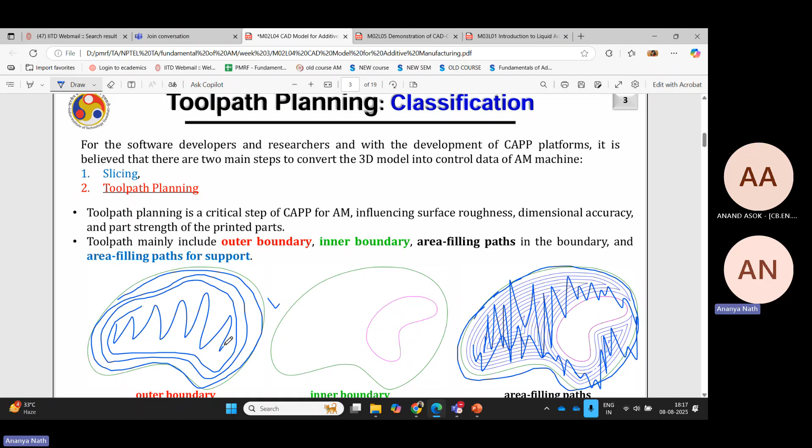So area filling methods can be 2D surface or 3D surface. In 3D surface, it can be grid cutting, pixel, mask, and path, or in 2D surface also. If we are talking about a layer, it's 2D geometry, but obviously the layer is 3D because it has some thickness. So the requirements of area filling methods: quick heat dissipation, minimum number of lifts, constant machine feed rate, constant step over.

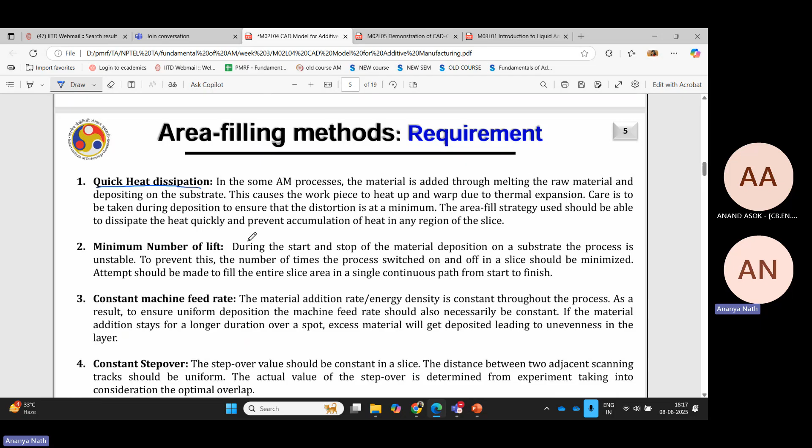Basically, when you are choosing an additive manufacturing process, you have to be sure about how the tool path needs to be planned. The tool path planning will not be the same for each process. It depends on the thermal gradient and the thermal history of the process. Depending on that, you have to define the area filling or tool path planning, as I described for LPBF and FDM.

Grid cutting is used in LOM, laminated object manufacturing, or sheet lamination. The paper sheet will come, and if this is your geometry to be built, a knife will cut this geometry out of the paper, and the portion that is not part will be cut as well. But if the knife moves like this and cuts, there can be some problem. So instead, it cuts the excess portion of the paper grid by grid.

So that it will be more defined, a more controlled process, and like that you can get the geometry. And when the next sheet comes over it, it will again cut the unused portion, and a roller will move from this side to this side onto it, so that the heat and the pressing of the roller can join these two sheets, and this process will repeat itself to get the final geometry. So this is one example of grid cutting.

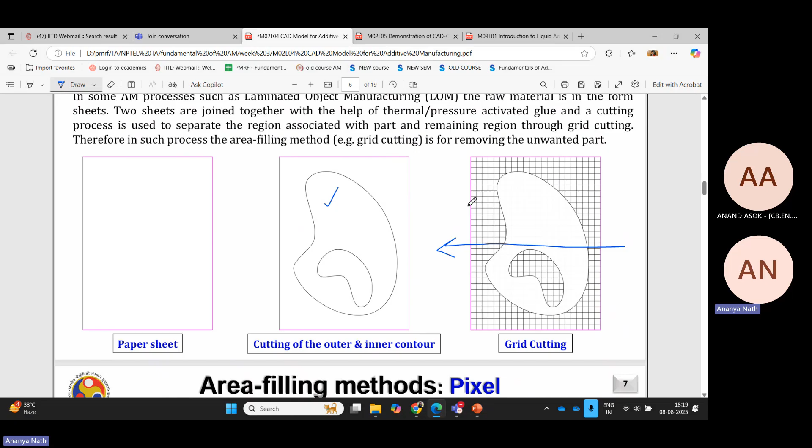Ma'am, can you explain once more? Didn't get it. Yes, yes. So in sheet lamination process, there will be a sheet of paper which will come onto the build plate. If this is the geometry that needs to be printed over it, there will be a knife which will cut the paper like this. So my mouse pointer right now is a knife. It will cut the sheet like this.

Okay. It will be systematic. Then in y direction also it will cut till end. I'm not going till end, but it will cut till end. So the unused portion, which is not necessary for my printing, this portion of the paper I don't need because this is the geometry. So it will cut the paper in this portion so that this geometry will be intact. And this is my first layer.

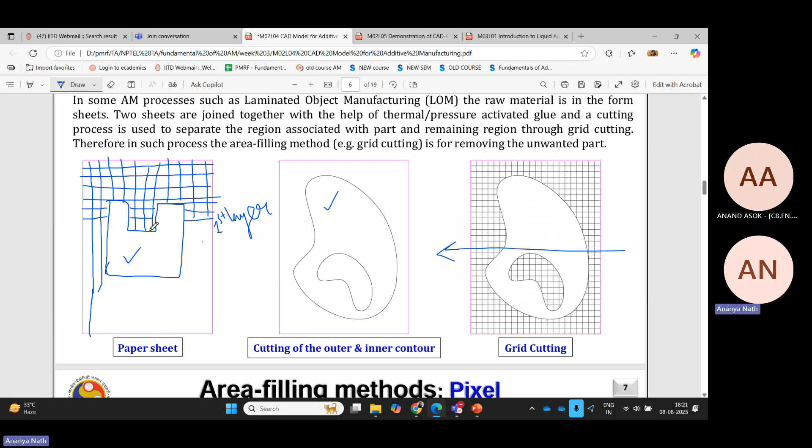When it is cut, another paper will come onto it, another full paper. Again, the knife will try to cut this grid so that this portion will be intact. Now imagine I have two papers in which this geometry is intact in both the papers. Now there will be a roller. This roller will roll over this surface.

So the roller, when it's rolling over the surface, there will be the pressing of the roller, and due to the rolling, there will be some heat also. The roller is a heated roller. So because of the heat and the pressing, these two papers will be fused together. This portion will be intact. Other portion will also be fused as well. But other portion has these cuts as well.

So after 500 layers, for example, this process is repeating. You will have a box like this, which is fully made of paper, right? But from the box, this portion is intact because this is my geometry, and all other portions have this grid cutting. So if now you take a knife and manually start separating this grid cut portion, you will get the intact geometry, and few cubes of paper will come out of it.

Do you understand now? Yeah, the intact portion will come out separately, isn't it, ma'am? Yeah. It will be a little bit fused with this grid cut portion as well. But if you start separating it manually with a knife, it will come out. So that is also a process by which you post process the final geometry produced by laminated object manufacturing.

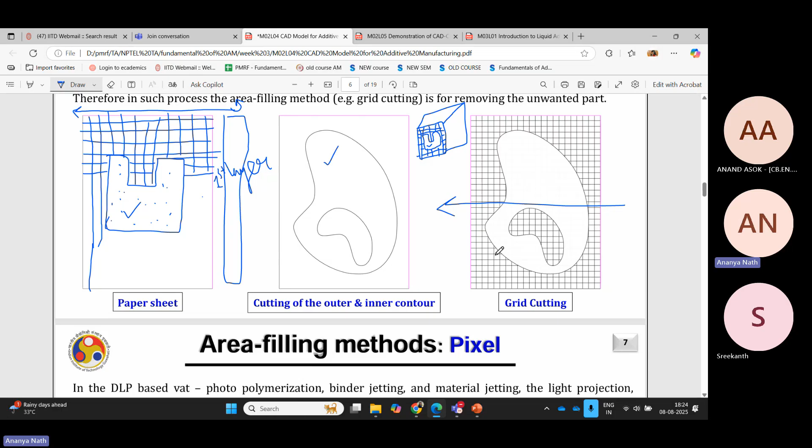So in this process, the tool path planning is basically this grid cutting. The tool is cutting the paper into small grids. So this is the method of grid cutting in laminated object manufacturing, which you cannot find in any other processes. So that's why tool path planning is very separate from process to process. Then come pixels. So pixel is another method of area filling.

So what will happen? In DLP based process, which is a vat photopolymerization technique, I did have a slide last class, if you remember, that there will be a vat of resin. Vat means a container, nothing else. There will be a vat of resin, a container full of resin, and there will be a build plate, which is mounted on a lead screw. This is the lead screw, and this is the build plate.

So, this build plate, and there is a screen from which the UV light is coming. So, this screen is actually placed here, just below the vat. So, now the UV light is coming. So, the screen is looking like this. This is the front view of the machine. This is UV light.

And this is the top view of the machine. From top, you are seeing the screen. Onto the screen, there is this vat full of liquid. And over the vat full of liquid, you have placed your build plate. So your build plate is basically now, if I zoom the view, then it's something like this is my build plate.

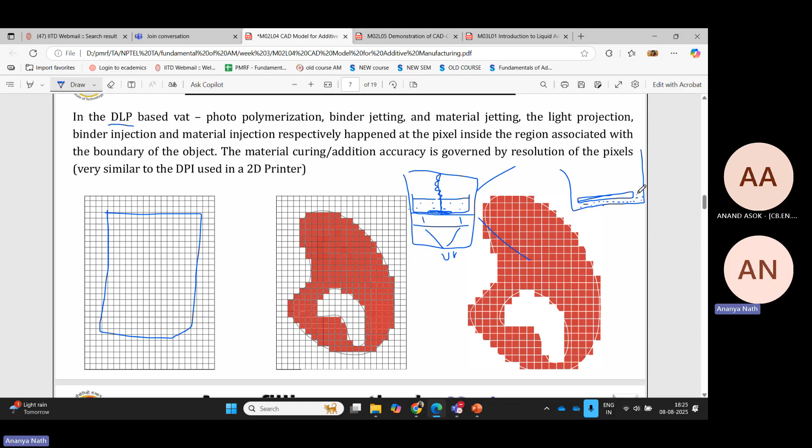This is my vat full of resin. And there is one layer thickness resin present below the build plate. And all other portion is also covered by the resin. I think this point is clear. This build plate is attached here. So this build plate can move up and down.

Now the build plate position is in such a way that the build plate and the screen, this is the screen, so this screen and the build plate are having one layer thickness gap in between. So now my build plate has one layer thickness resin. Now, if my geometry is looking like this and the screen is having this many pixels, so these small squares are called pixels. So in our mobile phone, when we take the photo, it is saved in pixel format.

So in some of the phones where the camera quality is not good, if you zoom the picture a lot, you will see the picture will be segregated into pixels. The picture quality is degraded, we say. So basically, the pixels are not very small, because of which when we are zooming, the picture is giving us that pixel by pixel view. That's why we are saying the quality is not good. So now this screen is also having some pixels. This is an LED screen or LCD screen, the same screen that we have in our mobile phone.

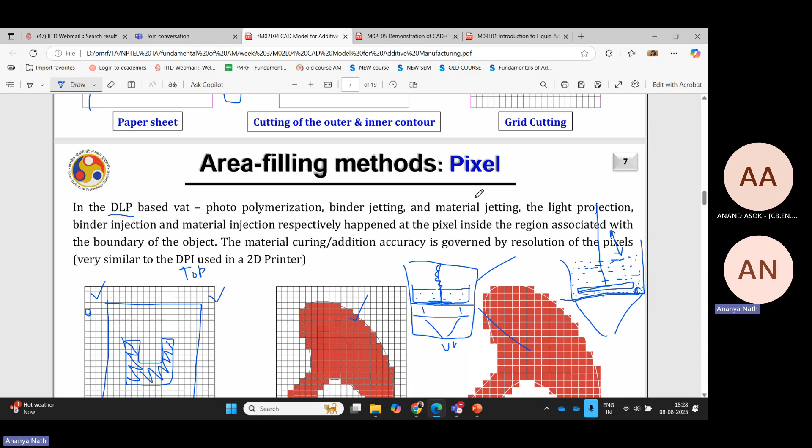Is it build plate or bill plate? Build plate. Yes, build plate. Okay, so only a portion of the build plate needs to be activated, right, ma'am? So there are two things. There is a screen. This is the screen. On top of the screen, there is a vat. Vat means a container. Now the bottom surface of the container is transparent to UV light.

And inside the container, the build plate is there. So if now you give the UV light, the UV light should reach the whole build plate, the whole resin. But now you have placed a screen in between, and in the screen, the pixels are activated in this portion. So only in this portion, the UV light is reaching the build plate. Is it clear? Okay. So the red color that you have shown is the area in the screen? Yes. This is the area in the screen that is activated, ultimately, by UV light.

Yes. So basically, the screen is having the pixels and it has some electrical connections. So when we feed the geometry in the machine, the screen knows in which layer how many pixels need to be activated. And activated means through that pixel, the UV light is coming to the build plate. The UV light is there. This is the UV light. It's reaching the whole screen, but the screen is not allowing the UV light to come and reach the build plate.

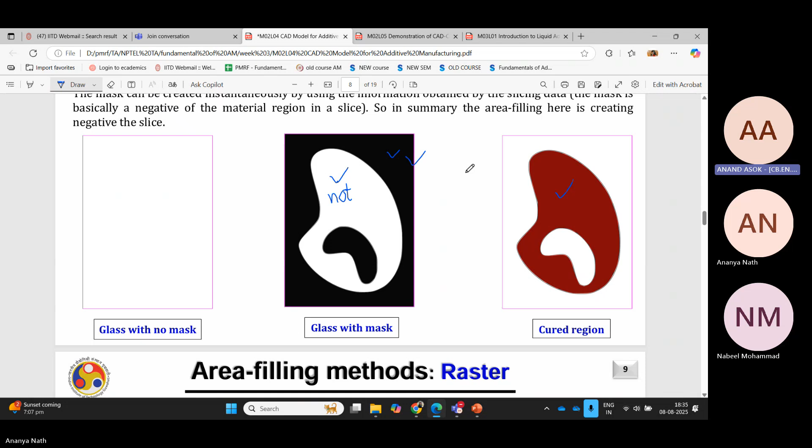So now comes the raster. Raster is a thing that you need to learn, because raster is a pattern that is used in all advanced additive manufacturing techniques. Raster means a path that the tool is moving.

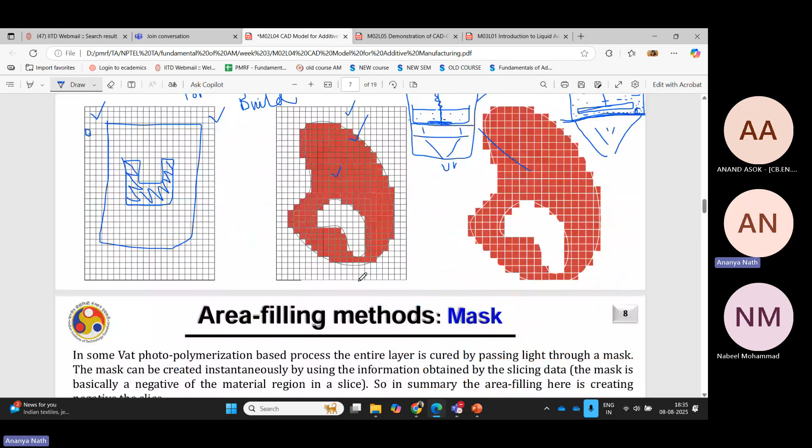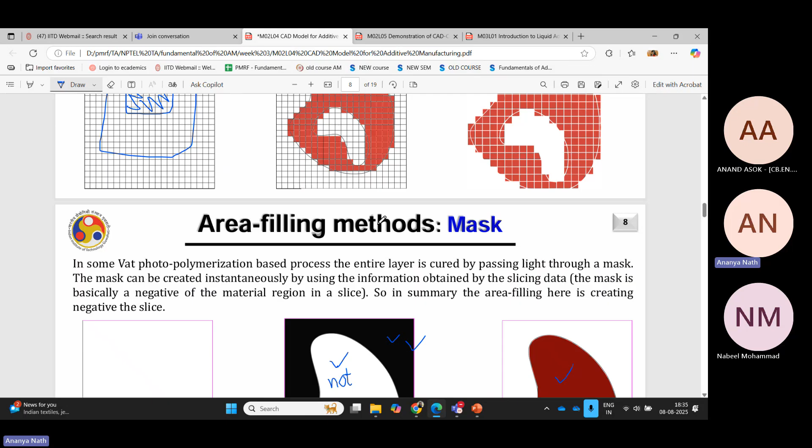In all the cases, we were using a third party. In grid cutting, the tool was moving to cut the grids - the tool itself was moving. But here there is a third element which is working. In DLP, this screen is the third element, which has the pixel activation. Here, the mask is the third element that you're putting onto it so that the UV light can come and cure - the UV light is actually the energy source. Here, the heated roller is the energy source.

But in some additive manufacturing processes like DED and LPBF, you cannot use a mask or a pixel. You have to move the tool itself, just like what was happening in laminated object manufacturing, where the tool itself was moving like this to cut the grids.

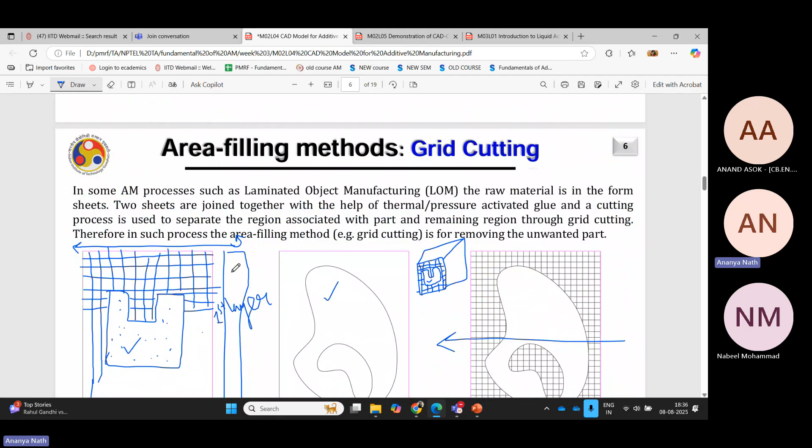Similarly, raster works like that. In case of raster, the tool moves in defined paths to deposit the material. For example, if this is the nozzle, through the nozzle the semi-melted wire is coming. If the wire is coming from here and the tool is moving in this manner, this dotted line is where the tool is moving to its next position, but it's off. The wire is not deposited in this red. These black lines are the deposited lines, these red dotted lines are not deposited, it's just how the tool is coming back to its next position.

So the head will deposit the wire, then it will come back, then again it will deposit, then again it will come back and deposit. This is how it works. So raster path pattern is simple, efficient, and robust to cope with boundaries.

However, the build accuracy is poor in the layer. For example, in FDM, each layer will have these raster patterns which are visible even after printing, because of which the layer roughness is not good. The part is rough, it has surface roughness, it will have some porosity, the geometry is not that well defined, the surface is not that smooth.

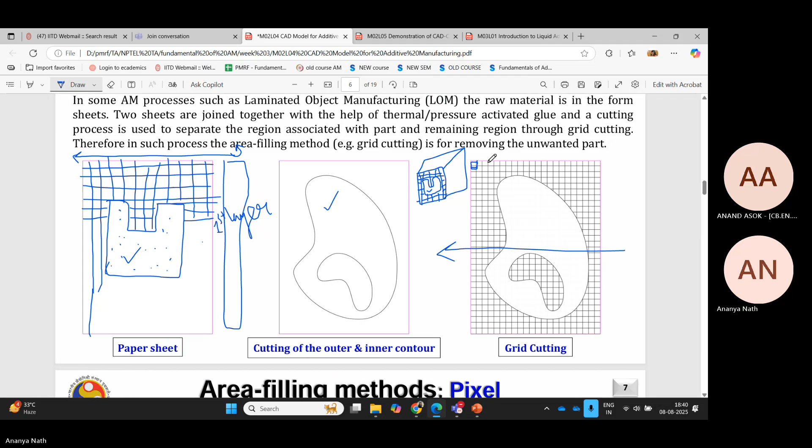Because in pixel, there was only one option - the pixels will be activated and cured. In mask, you just cut the mask in this shape, put it, and it's done. In case of grid cutting, the tool will move and cut the grids - the pixels of the grid, these small squares, are same in length and width. So it's simple.

But here we have shown three different patterns. Why is it so? Just imagine when the whole part is printed like this, and after that you do some mechanical testing, for example tensile testing. If you tensile test this part in this direction, meaning you pull it in this direction, versus pulling it in this other direction, the result will be different because the property in X direction and Y direction of this part will be different. The strength of the part in X and Y will be different because it's very directional deposition - you are just depositing it in one direction.

The porosity in the gaps, like in between two lines, will be very high. If you do rastering in just one direction, it's the same issue. But if you do the third one, you are alternating it, so ultimately when you do the tensile testing of this part in this direction or that direction, the property will be to some extent the same. So we are achieving isotropy in the part.

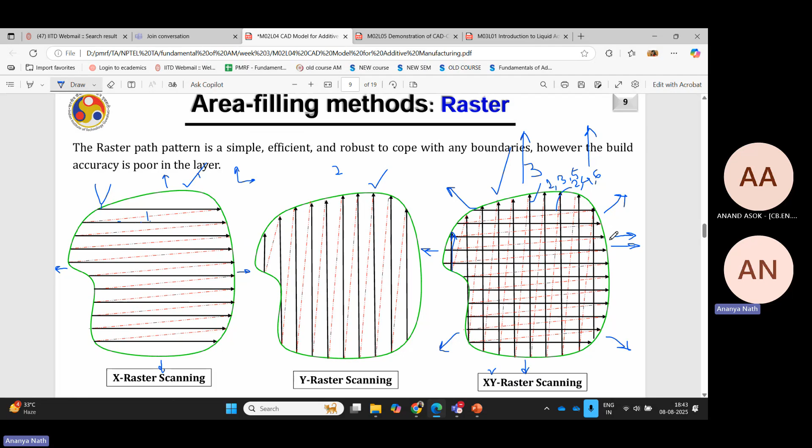When your layer is going only in this direction, this strength will be different than X and Y, and this diagonal strength will also be different, because all your layers are going towards X plus and Y plus. There is no layer going in X minus and Y minus. That's why you get the zigzag pattern.

Zigzag pattern means it's like a rastering pattern. This is my X rastering, and in the next layer it will be my Y rastering. This is called XY rastering with zigzag pattern.

If I talk about this first layer, it itself has isotropic property because all the deposition is not towards one direction, it's in opposite, alternative directions. And if I talk about the second layer...

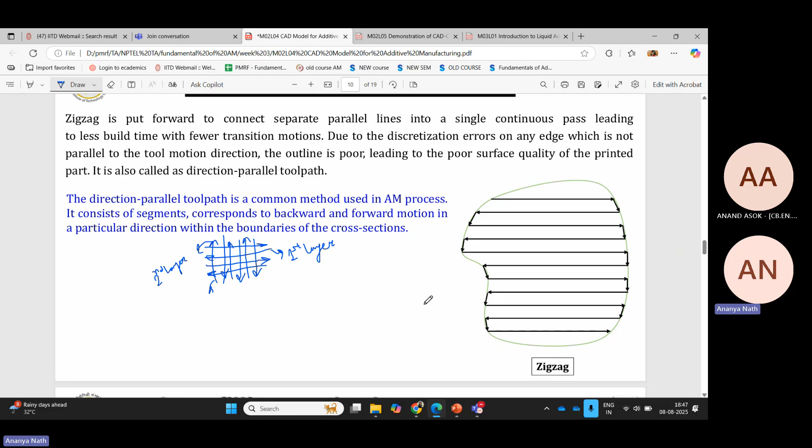Yes ma'am. So if this is my first layer and this is my second layer, in each layer now I have alternative directional layer track deposition. This one line is called a track, and this whole thing is called a layer. Layer by layer we are depositing the product. So now, as I have alternative track deposition, my mechanical properties will be even better, more isotropic, which is required. That's why in rastering, XY rastering is better, and then comes the zigzag pattern, which is again better.

Ma'am, does this contour mean boundary? Or boundary, so...

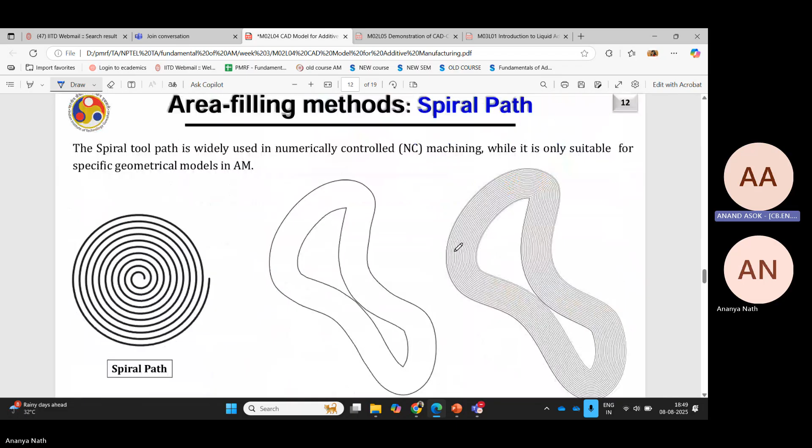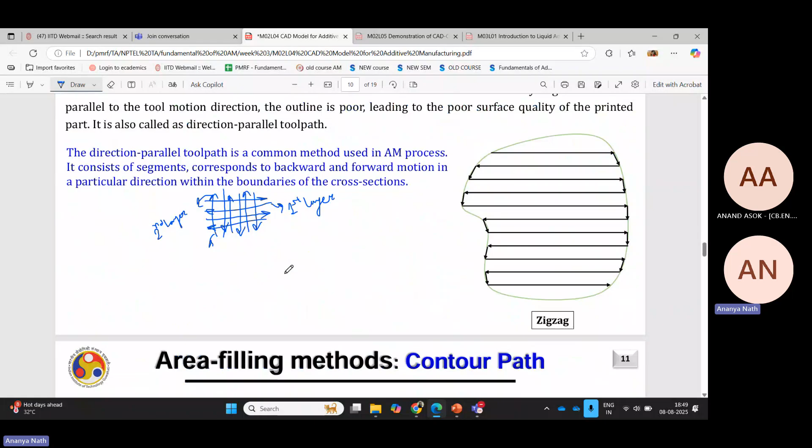It's not only boundary, but how we are scanning the boundary here is replicated for the whole geometry, just by reducing the size of the boundary. You see these lines? These are basically the deposited lines. It's scanning the boundary and reducing the size of the boundary to reach the center of the part. It's called the contour path. Basically, the contour is mimicked for the whole scan layer, and its dimension is decreasing till it reaches the center.

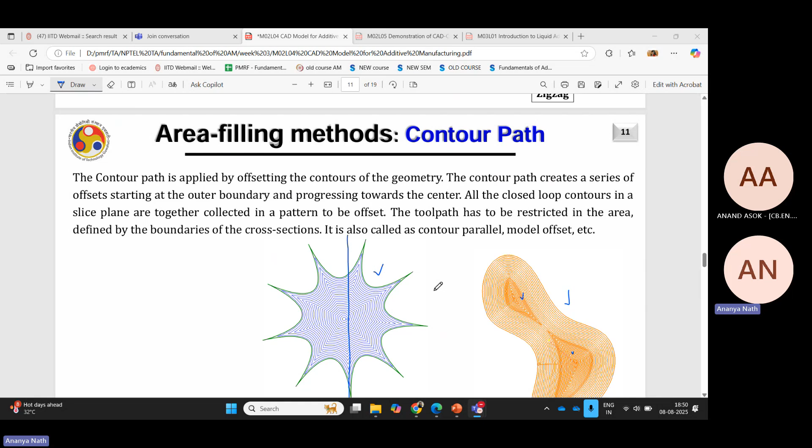Then comes the spiral. Spiral is different than the contour. Why? Because if you see this geometry carefully, you'll see this is one contour, this is another contour, this is another contour. These contours are not connected to each other.

That means the tool needs to start and turn off repeatedly. There are about 23 contours here. So to print this simple geometry, the head or tool needs 23 times of on and 23 times of off.

Each turning on and off will take some current, and each will have some inertia as well. If it's a tool moving like this and you're turning it off, there will be an inertia, and because of that inertia there can be a little extra deposition at that point. If the point is moving like this and you turn it off, it may do this.

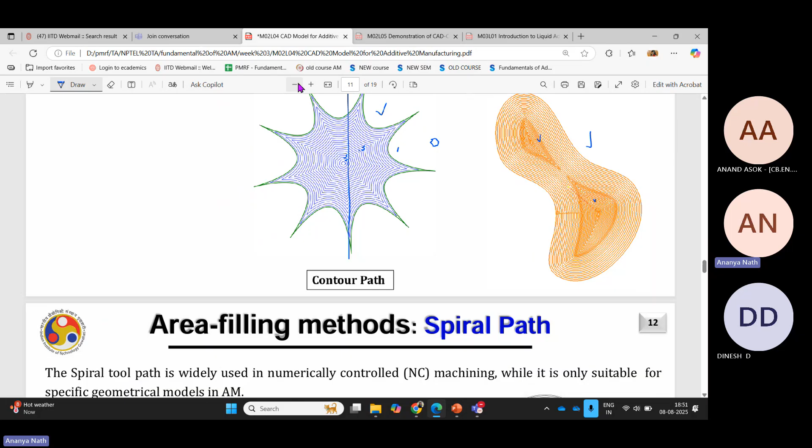So that means your machine will have a lot of turn on and turn off, which is not good for the inertia and for the quality of the job, and also it will take more current. So in that case, you can print it like this contour for this part, but there will be a connection between each contour so that my laser or my head will not have any turn on and off in between. It will turn on, and it will turn off when the whole layer is done.

Then it's better. Because if for this part there are 500 layers of printing and each layer is taking 23 turning on and 23 turning off, then there will be 500 into 23 number of turn on and turn offs for this part to be printed, which is ridiculous. Because of which people invented this spiral.

Sorry, can you repeat your question? How does 23 into 500 come? So if this part has 500 layers and each layer is taking 23 turn on and 23 turn off, then you will have 500 into 23 number of turning on for the whole part. Okay, so this 23 turn is for one layer, right? Hmm. Okay. This is one layer, and the tool is moving like this.

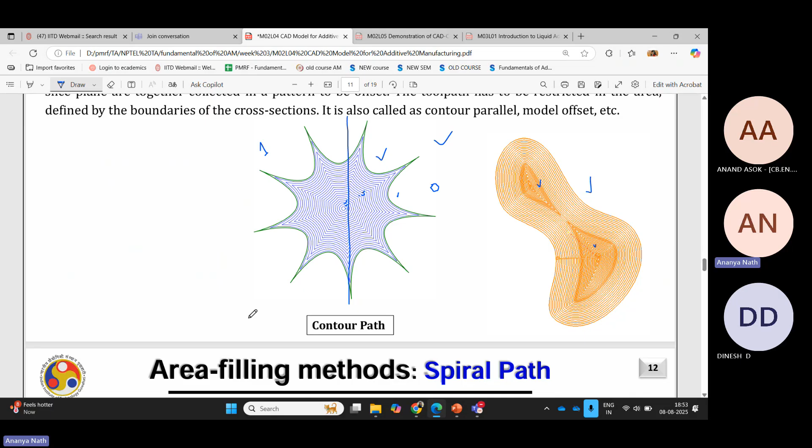So to reduce that thing, because it's ultimately CNC controlled, and if you're putting so much turn on and off, it will take a lot of current, it will have its inertia, it may distort some geometry, it may distort some accuracy of the part. So it's better to have one turn on and off for each layer. So if it's 500 layers, already you have to turn on and turn off the tool or the laser 500 times for 500 layers. So it's better to go one way, in one go.

So that's why spiral. So in spiral, if this is my circular geometry, it may go like this, and it will turn off when the whole geometry is scanned. Do you understand this spiral thing? It's the same like contour, but it's not turning off. It goes like this. Is this connected? Connected. Yeah, connected.

It's just like if you're placing a rope like this, so the rope will not have its end. You will just place it like this in a roll, and it will have its end at the end of the part, and it will have its starting here. So this is how the tool will move, or this is how the laser will move in case of different processes.

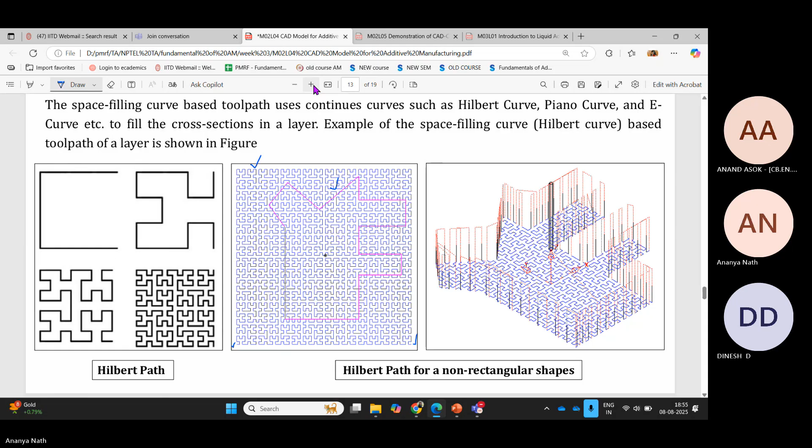So let me tell you the thing. This is called the Hilbert pattern. If you see it carefully, there is only one starting and there will be only one end. So this is the end and this is the starting. If I zoom the picture, this is the starting and it goes like this, and it goes like this to cover the whole path, and then it ends here.

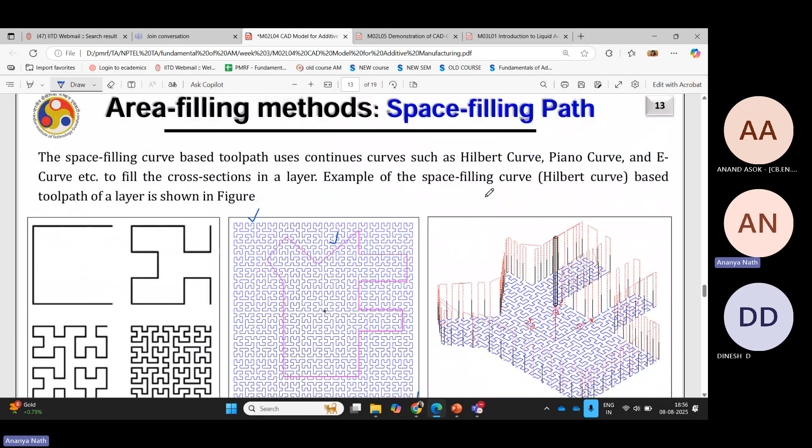This area filling technique is called space filling path by Hilbert path, and thus you can have only one turn on and turn off. But at the same time, if you are placing a random geometry like this pink line, then whatever is coming inside the pink line, that Hilbert path will be followed to print this layer. So here also there will be a lot of turning on and turning off.

If you now see this picture carefully, this Hilbert path and this portion are just subtracted from each other, and now you get the layer here, and this layer will have a lot of turn on and turn off because the Hilbert path is ending here. It's not continuous in this geometry. Do you understand this point? If you subtract this layer or this contour from this Hilbert geometry, you get this. Is it good to understand?

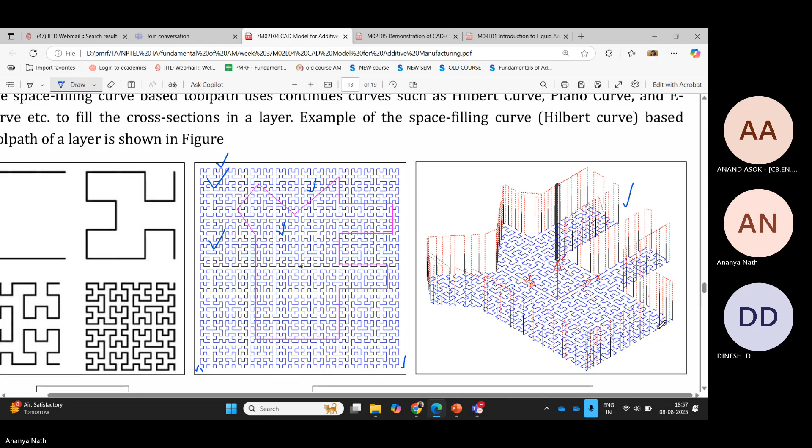So whenever the path touches the boundary of this geometry, it will turn off, right? Yeah. So you can try to make the Hilbert in between, then you'll not have any turn on and off. But it works like this. It will make a Hilbert in the square region, and whatever your part looks like, it will just try to take that part. It will subtract the whole Hilbert from your layer, and it will have this space filling technique. But there is also a lot of turn on and turn off. So then comes the MAT.

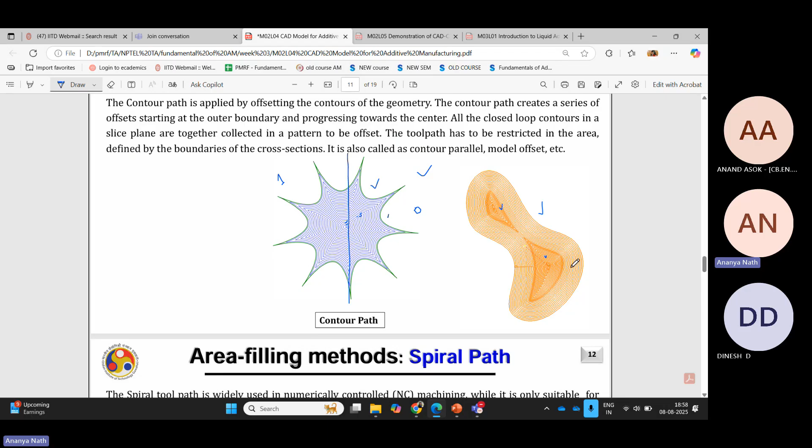Now, in case of contour, you were repeating the same contour of the geometry for the whole geometry. So you were repeating the contour to fill the whole geometry. You were not changing the contour pattern for the whole geometry. If you see here also, here you are repeating this only for the whole layer to cover. Here, you are doing the same thing, but you are not having any turn on and turn off for a whole layer. It's same. But for this thing, you first try to make different contour for different region.

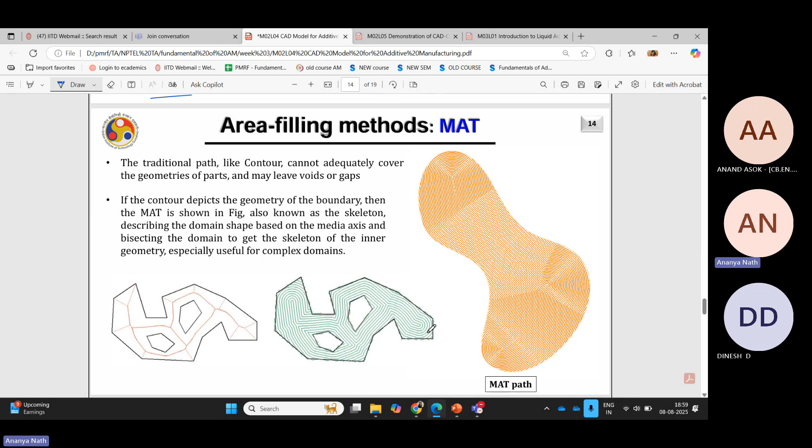So for this, you are not going like this. For this, you have a different contour. For this, you have only line. For this, you have only line. For this, you have line with separated lines. Here it has some corner. Here again it has some spirals. So this is also kind of spiral technique, but it has different space filling path for different part of the layer. The whole layer will not mimic the contour.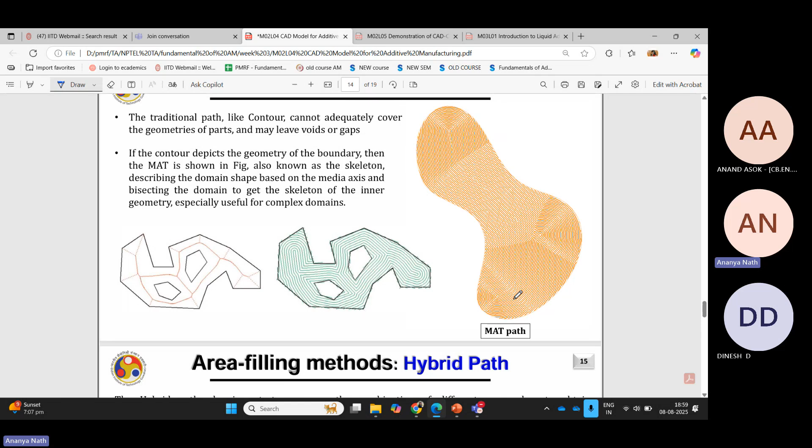Do you understand this? It's a little bit difficult to tell, but if you see this picture, I can show you zooming out. So this part, in case if it was spiral path, or this were the contour path, then it could have been like this. This could have been the contour for this part to be printed, right? If it were a spiral and contour path. This much you understand already.

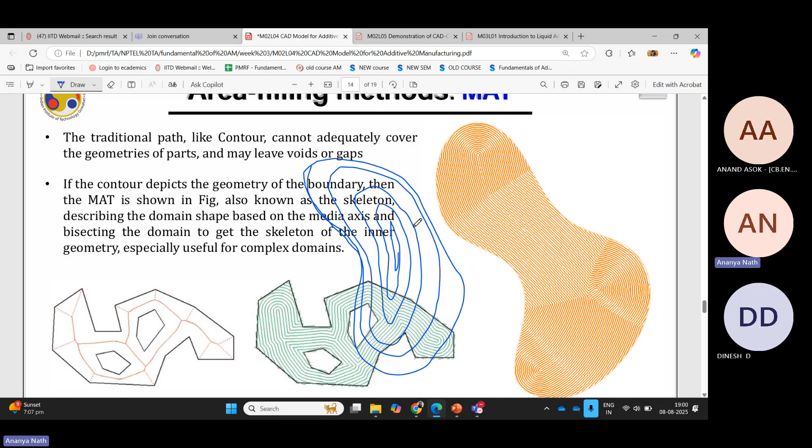But as it's a different area filling method, which is called MAT, it has different contour in this portion so that you can have better accuracy for the part. This part has different contour and this part has different contour. Again, this part has different contour. But it's all about the contours only, and it has lot of on and off to make it more accurate, because this portion is more curvy, so it needs more attention, but this portion is like a flat portion, so it doesn't need more attention, so you can just print the parallel contour lines to fill this area.

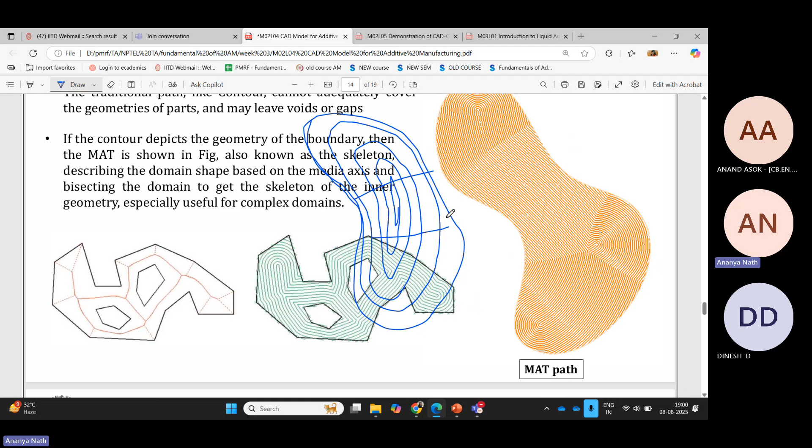So that's why they have chosen the contour lines to fill this area, but this has a curve. So to define the curve more accurately, they have printed this contour curve lines to fill this portion. Again, this has a different curve shape. So that's why they have taken different curve contour to fill this portion, and this portion again is different. So that is called the MAT area filling method.

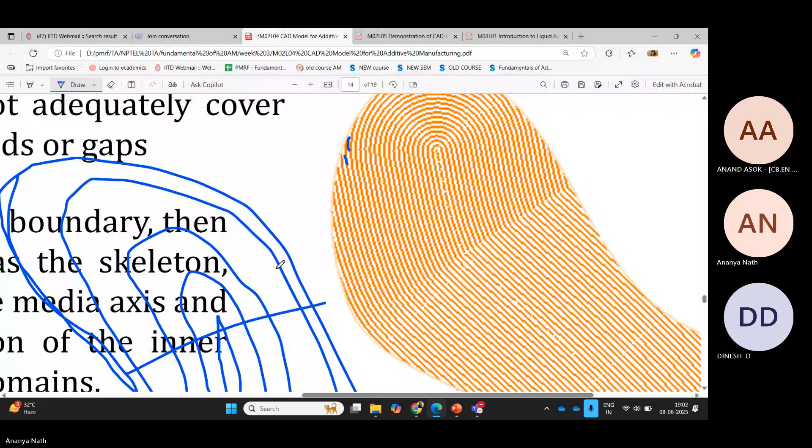Then comes the hybrid path. So till this point, if you see this part carefully, each contour is ending. It's too much zoom, I think. Let it come. Just a second. Yeah.

If you see this part carefully, then the contours are ending at the periphery abruptly. It doesn't have any periphery or boundary scanning. At the boundary, the contour lines are having its ends. So at the boundary, it will look like this. It is defined, it's good, but if we are measuring the surface roughness or porosity, it will have more porosity. It will be not that much defined. It will have some surface roughness.

So instead, for area filling, what we can do is we can do hybrid paths. So first we can do the contour scanning for the periphery. The contour scanning was something like this for the whole part. But instead of the whole part, we can do it for 3 layers. And for the rest of the part, we can do just the zigzag or the XY raster scanning. So that's why it's called the hybrid path. And this is the more used way of filling the area in any additive manufacturing technique.

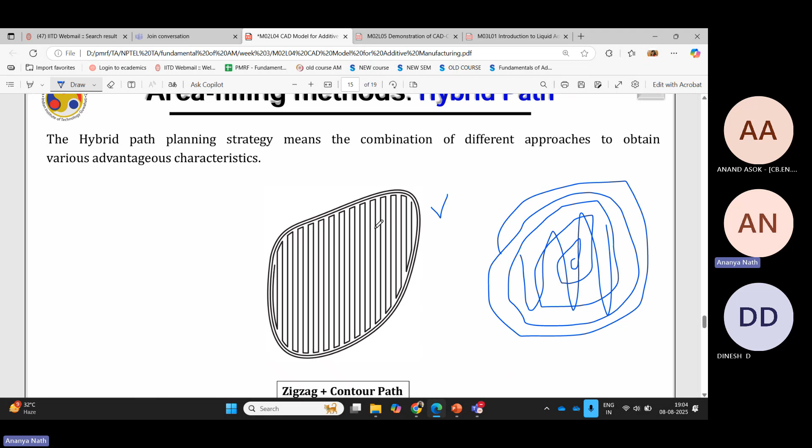If you remember, I have already told you in my second slide itself that in LPBF, first we fill the area and then we do the boundary scanning. In case of FDM, first we do the boundary scanning and then we fill the area. So both come under hybrid path. So this is the concept of different area scanning methods.

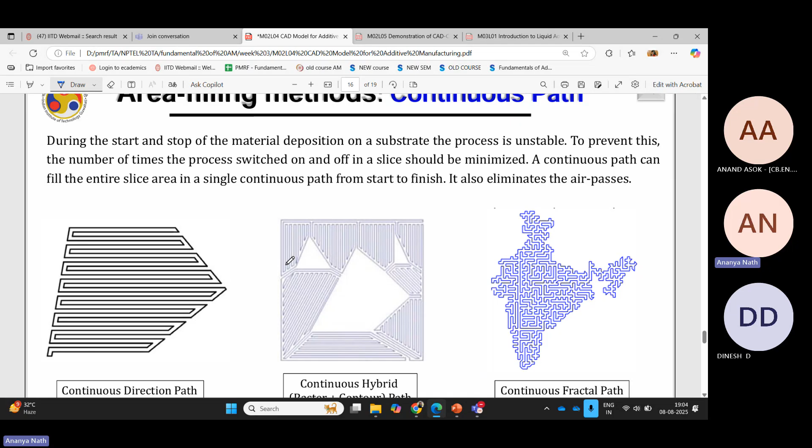Now again, this is called continuous path. So here it's like first the boundary and then the raster. So it will again have some on and off. So to avoid that on and off, what people are doing is they are first dividing the part in different regions, and in different regions I am doing the hybrid scanning separately, but it will not have any on and off.

So if you see, this is a very complicated scan or layer. It's an India map. So here we are having the start and here we are having the end. So it has covered the whole area by Hilbert scanning, but the path is continuous and it is having only one on and off.

So anyway, whatever our area scanning method will be, we will always try to have only one on and off for the whole layer to optimize the power consumption, to maintain the accuracy of the part, to have a controlled building process. So this is again a much higher hybrid because it has raster, it has contour path, also it has some selection of region to have different contour and raster scan.

So Ma'am, does this have a single starting and ending, is it continuous? Yes, it has a single starting and ending. If I try to find the starting, I can't find the starting, but if you see the lines, you will observe that it has only one start and end. It's going like this, then coming here, then again it's going like this, then it's going like this, then again scanning here, then go here, then scanning here. So it has only one on and off.

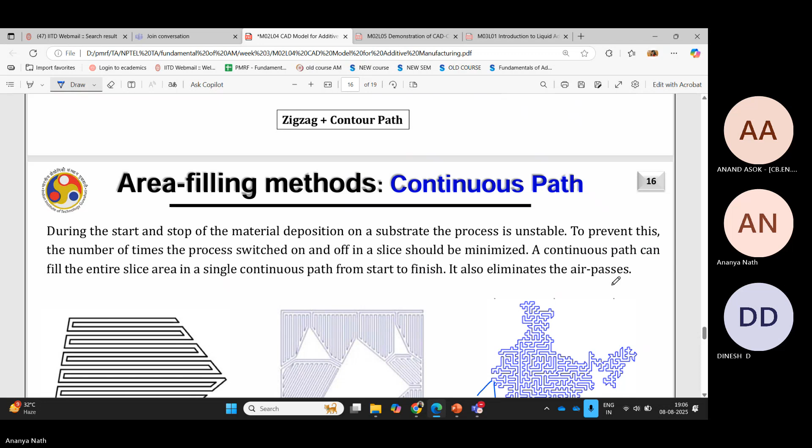But again, it has all these three. Yes. That's why it's called continuous path. Okay.

So the next thing is area filling method by topology optimization. Now, the methods that I have talked about are some area filling methods where you have considered that if my geometry looks like this, all my layers look like this, so you are filling the whole area to have a 100% density part. Do you agree with this point that if my part looks like this and if I'm scanning all the area like this, it will be a 100% density part or towards 100% density part?

Yes. But the middle portion is not rendered. Yeah, this is not a part of the model that I'm printing. It's a hollow part only. Okay. So it will be a 100% density part. Or, 100% is never possible, so it will be 99% density part. So it's a highly dense part.

But in some cases, for example, it's very common in case of metal or plastic 3D printing both, that people don't print with 100% density. Your part should have a 100% density in terms of your layers. Like your layers should not have any porosity. Your layers should not have any high surface roughness. But if you still want to reduce the weight of the part, you can do the topology optimization. So I'll repeat this thing.

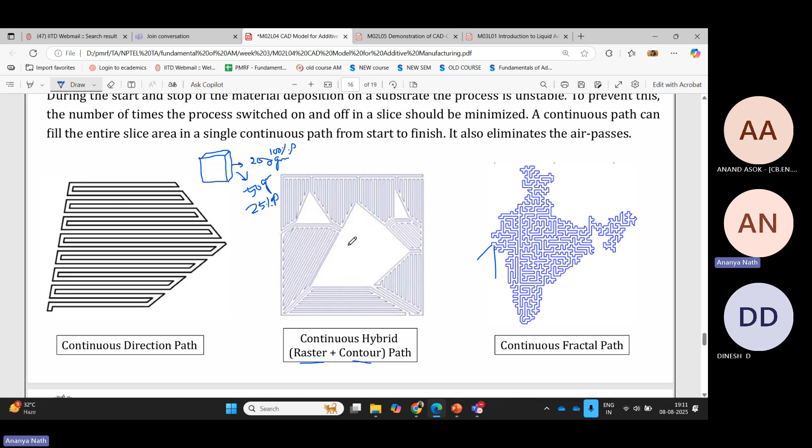Or even in some cases, you'll see, rather than a fully dense part, some part with 25% density will have better strength, because the way I have put the gaps in between the layer is in such a way that the strength or the load bearing capacity has increased. How? So all these things take place by topology optimization. So this is the example of topology optimization.

Now let's come to one point which is called the lattice. There is something called lattice structure. If you know what lattice structure is, it's good. But if you don't know, then the simplest example is the honeycomb structure that you see in the honeybee, their shell. That is the honeycomb structure. So what the honeybee makes for their house, that is the honeycomb structure inside.

So this is how it looks like. So if you print the cube with the wall thickness, for example, this cube is having 100 length, and in that cube you have printed this wall with 5 millimeter wall thickness. So your wall thickness is 5 millimeters. So from outside, your cube is looking like a dense cube.

But inside that, if you put this honeycomb structure, and each honeycomb structure is having some wall width, and the white portion is actually empty. This black portion is where you have deposited the material, but it's not this much thin. It has some width. Maybe the wall width is 500 micron. Then you can save a lot of time, lot of material, and lot of cost.

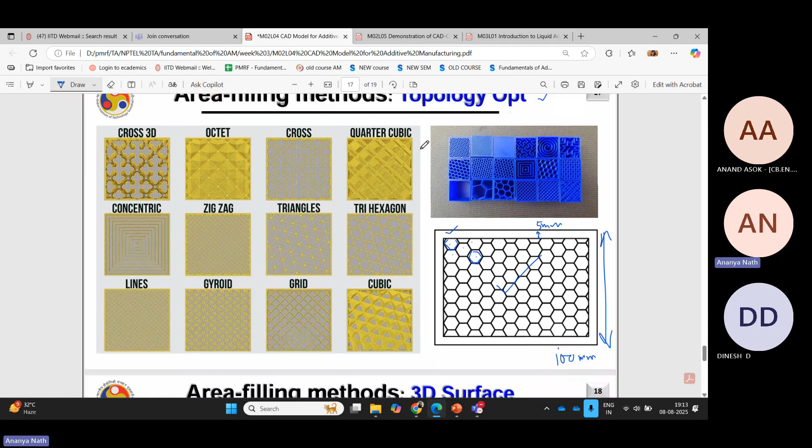I also have some lattice structures here, and these are the other lattice structures that you can see from these pictures. So these are not random. These have different purposes. They serve for different applications. Some of them will have better strength than 100% dense parts. So that's why topology optimization is very, very important. And this is also an area filling method. Area filling method for 3D structures.

So now we were talking about the single layer, but in case of the whole geometry, it need not have the same filling method for each layer. It can have different structure in different layers, and depending upon that, you can change the filling method. For example, this method is very simple.

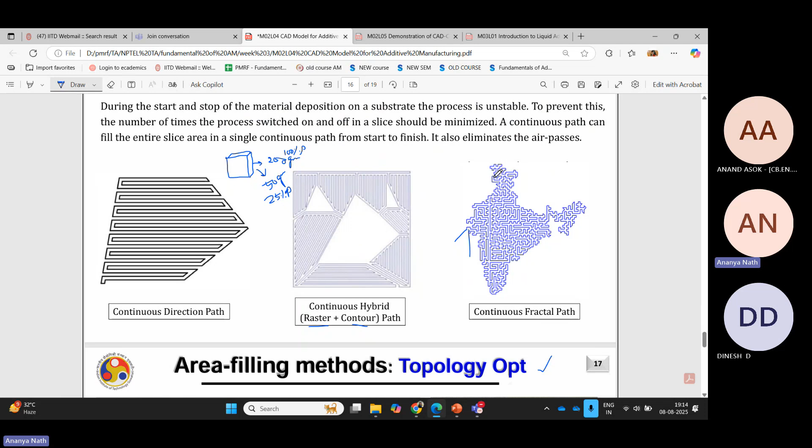to have accuracy in each portion of the part, because different portions of the part may have different curvature, different boundaries, different shape, geometry, topology. So depending upon that, you can change the area filling method. And this is what was covered in the first lecture. If you have any doubt, you can ask me.

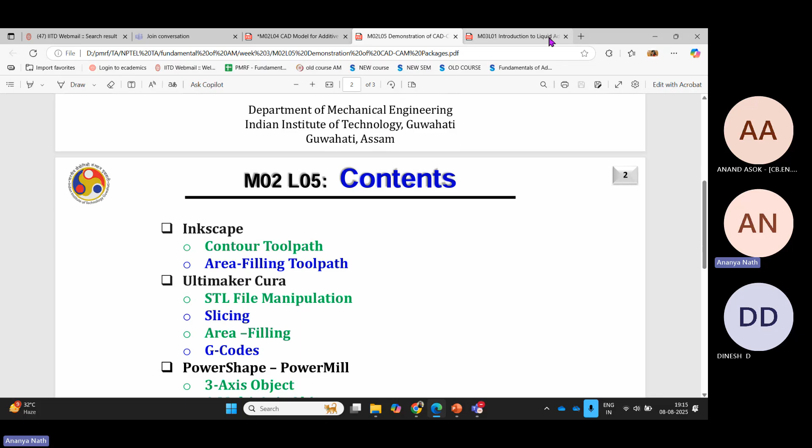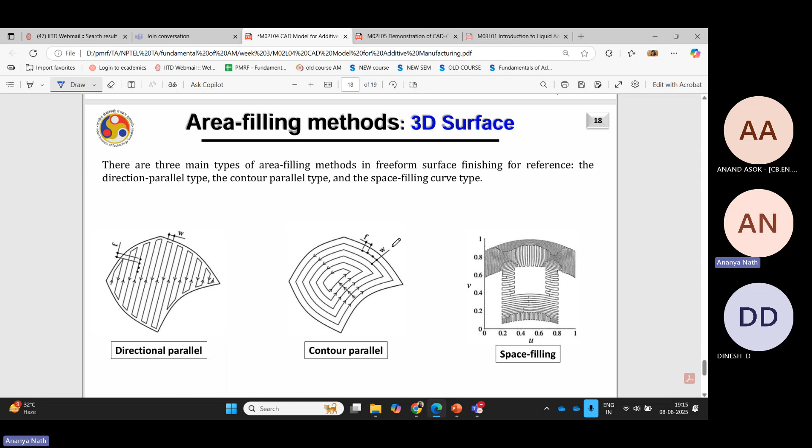And for 3D surface, is there any advantage over the other? Can you repeat your question? Like, is there anything specific to know about 3D surface? Okay, no, actually 3D surface is a little bit different. So, for example, if you are printing using a robotic arm, your robotic arm will obviously have more than 3 or 4 degrees of freedom. So, if your robotic arm can move like this, that will have a 3D layer.

Generally, this finger is my tool from which the material is coming, and this is my build plate. Normally, the printing will take place like this: one layer, second layer, third layer, fourth layer, like that. But if your tool is mounted in a robotic arm which has more degrees of freedom, then even your layer may look like this 3D surface. It has X, Y, Z, all the coordinates.

So in that case, the area filling method will be the same like contour; Hilbert is not that much used. So contour scanning, raster scanning, zigzag patterns, these are the patterns normally used. So in that case, you can just do like this for 3D surface. This is what is meant by 3D surface scanning. Understood? Yes.

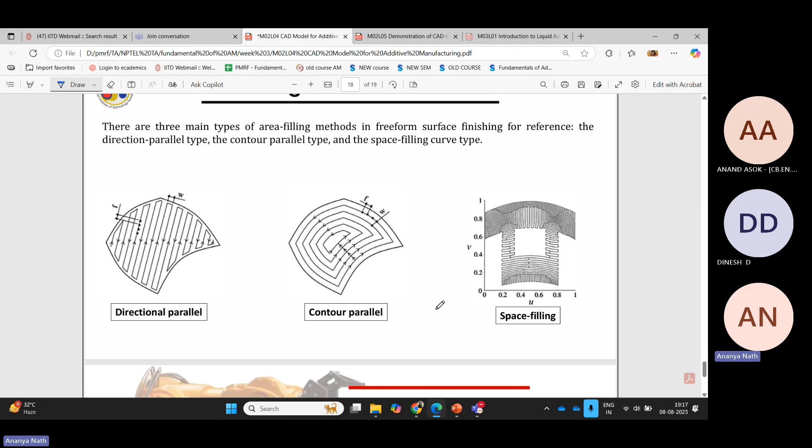So this gap between two tracks is important when you're filling the curved surface, because for a flat surface it's the same, but for a curved surface it will be different depending upon the radius of the curvature. This is all about the first lecture.

In the second lecture, professor has covered a few softwares. So it's very interesting software. I don't have all the softwares with me. I use different softwares for slicing and build job preparation. So the softwares are mainly used to define the tool path, define the slicing, put the process parameters for the process, or the simulation of the part, how it will be printed. So these are the things you can see from the software.

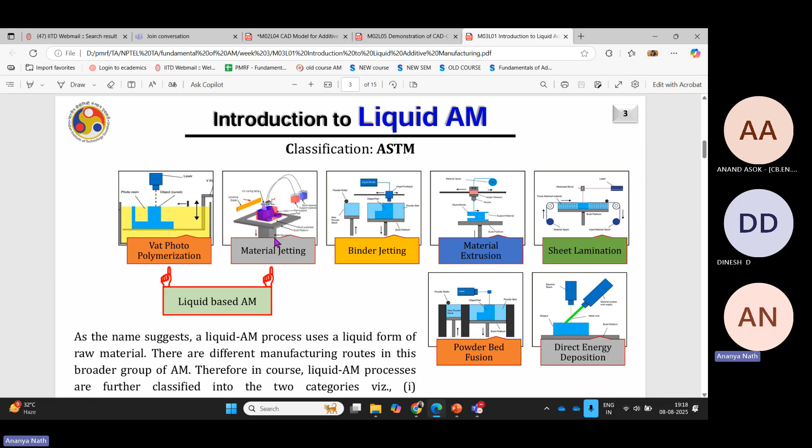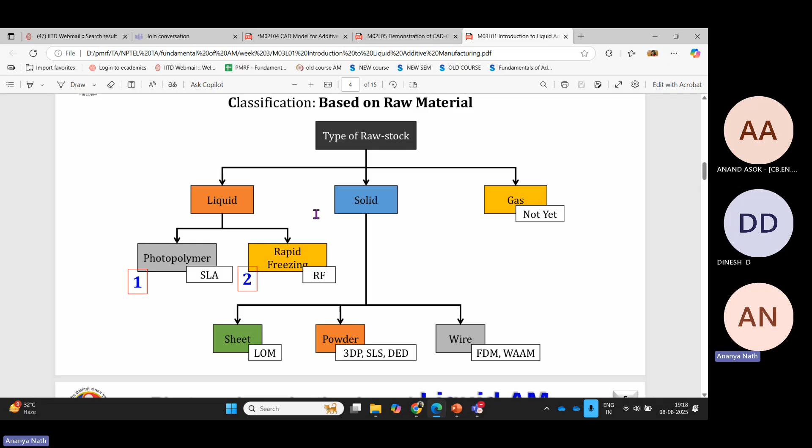Next is the liquid-based process. So these are the two liquid-based processes that sir has covered. In this week's lecture, sir has covered mostly the Vat photopolymerization technique. I have already told in my last to last class how Vat photopolymerization works.

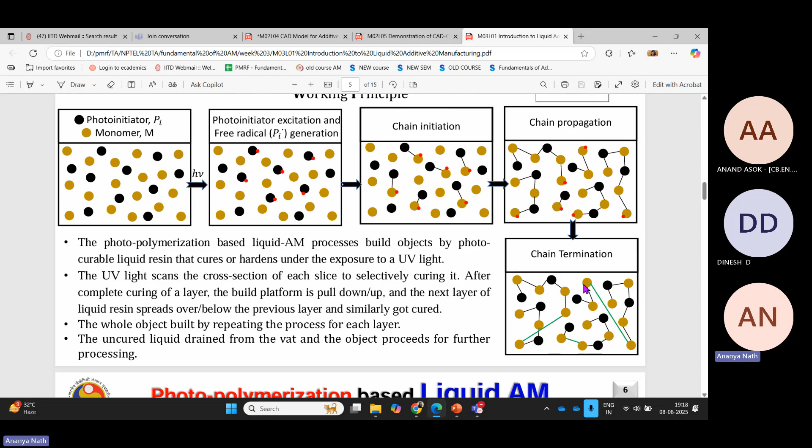Basically, there will be a photo initiator, and if you put the UV laser, the photo initiators will give some free radicals in the liquid medium, and that free radical will start the chain reaction in the monomers, and the chain propagates and makes the polymers out of it. When the polymer is made by the chain propagation, basically it's cured. So you will get the solidified part.

I'm not going into deep. Rather, let's go to the previous year questions from week 3. I'll show the question, you try to answer. In a DED process, a complex shape needs to be filled with very low voids and good boundary retention. Which tool path is preferred? Any guesses?

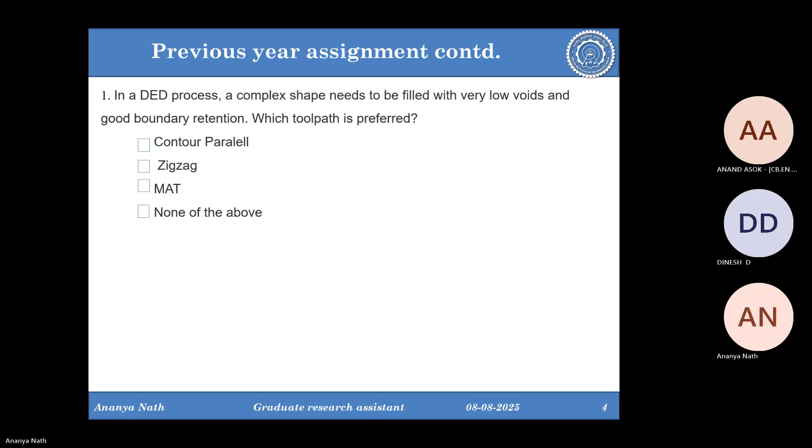It's MAT. Because in MAT, see the options. It's a complex shape, with low voids. In MAT, it will have different contours and different scanning spirals in different regions. So it will be better. It will give better accuracy in terms of the boundary and the voids or porosity.

In the zigzag tool strategy, the toolpath direction is rotated by an angle in each slice. If grid cutting is applied on the inside of the exterior contour and outside of the interior contour, then the final area will exclude the desired area. Tool lift is minimum in direction parallel toolpath. Ma'am, second question, can you show once more?

In the zigzag toolpath strategy, homogenization of the part property could be achieved. As I said, it will be zigzag and rotated at the same time. Then it will get the homogenization, meaning the isotropic property of the part. As I showed, in zigzag it will be like this. This is my first layer. My next layer will be this. I am doing zigzag and I'm rotating as well. Then only I will get the homogenization of the layer. Otherwise, I will not get it. So this will be the case.

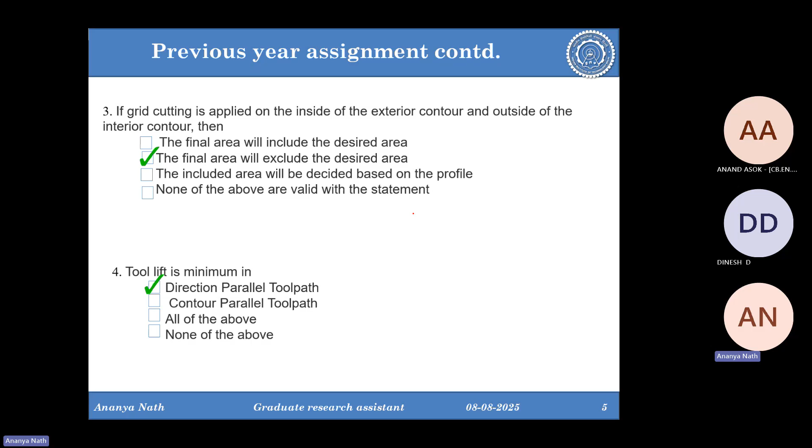If grid cutting is applied, these are straightforward questions. If you see the PPT, you will get the answers. And if you just watch the videos carefully, you'll get the answers. The spiral toolpath fails in which of the following aspects? Constant step over.

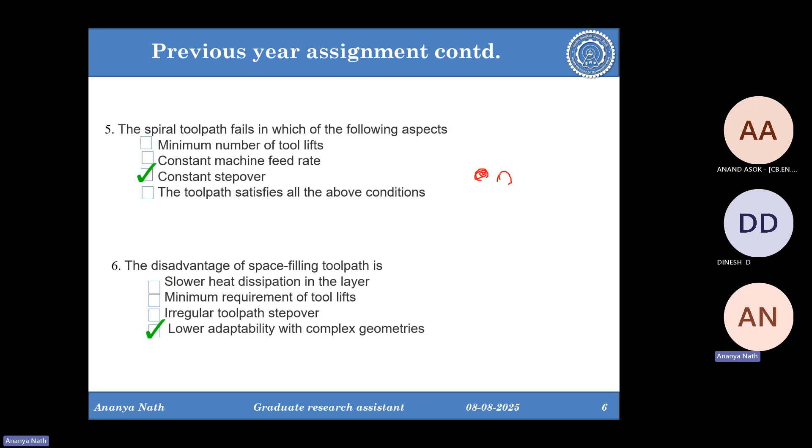The disadvantage of space filling toolpath is lower adaptability with complex geometry. So why it's advantage and disadvantage at the same time: for complex geometries it's good, but if it's very complex, then the spiral can be a little bit difficult to accommodate. If you have a very small region to cover, then the spiral will be difficult to accommodate in that small region. That's why.

In which toolpath does a series of offsets from the outer boundary progress towards the center? Contour parallel, contour path. In both cases, contour parallel means just contour with parallel lines, and contour path is again parallel, because even if your geometry has curved surfaces, it will just have the contour and it will reduce the size of the contour till it reaches the center.

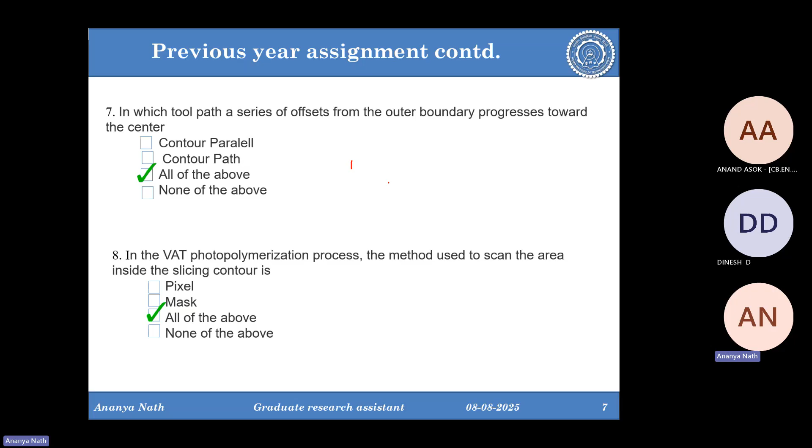In the VAT photopolymerization process, the method used to scan the area inside the slicing contour is pixel, and we use mask as well. In Inkscape, the following extension is used to convert the path to G code. You'll know it if you see the video of the software, how to use it.

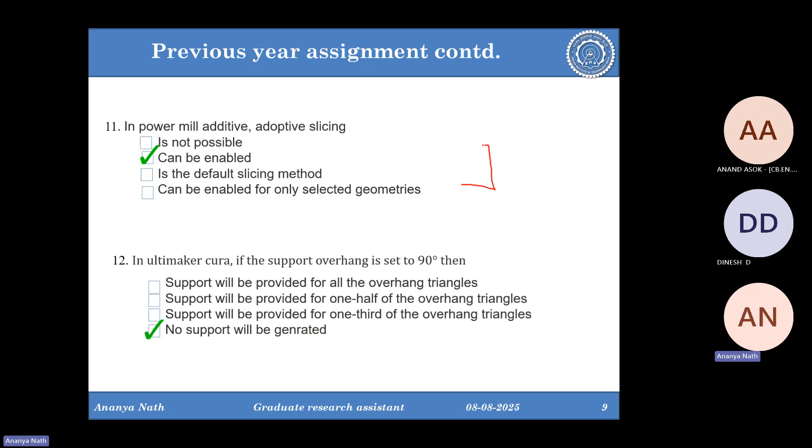Which one of the following options in Ultimaker Cura is modified to produce only stable support placement? In PowerMill Additive, adaptive slicing can be enabled. In Ultimaker Cura, if the support overhang is set at 90 degrees, then no support will be generated. Support overhang 90 degrees means this is the part, and if it's 90 degrees, obviously no support will be generated.

A galvanometer is a tool with multiple mirrors, and the mirrors reflect the UV light so it reaches the resin. It's a bunch of mirrors; I can't show you here because I don't have a picture of it. Sir has demonstrated how the mirror works, so you will see. The scanning system used by robotic SLA is flying optics. The photopolymer VAT is non-stationary if the scanning system is none of the above.

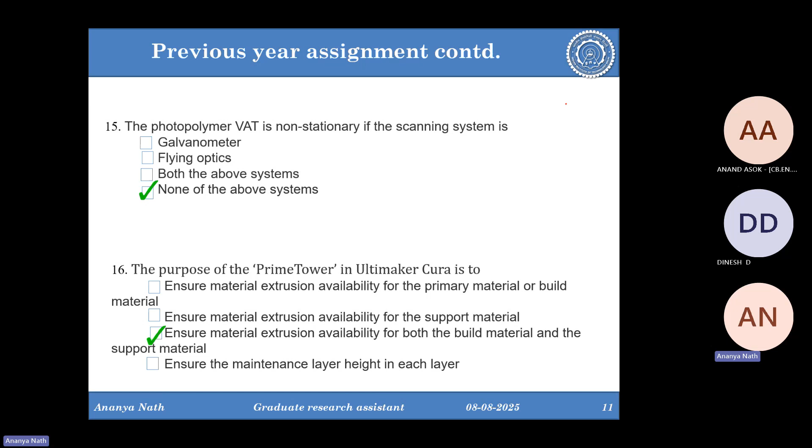In which of the scanning systems are mirrors employed? In galvanometer, it works with the mirror arrangement in X and Y direction. And DLP again has a screen with a mirror to deflect the laser or UV light. So the answer is all of them.

The most unique fact about liquid is that it can realize transparent objects because you are using liquid resin. It depends on what color the resin is. If your resin is transparent, then you can print even transparent jobs. If your resin is of different colors, then your part will be of different colors.

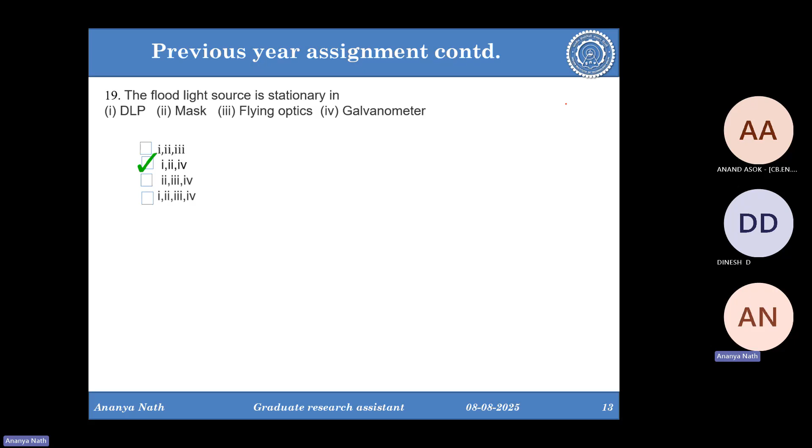The floodlight source is stationary. In DLP, the UV light comes from the bottom, so it's stationary. With a mask, you're putting the mask for each layer and the light is stationary. The light falls on the whole build plate, and wherever the mask is not present, that resin will be cured. In galvanometer, the arrangement of mirrors in the X and Y direction will deflect at an angle so the required amount of UV light is reflected and reaches the build plate, so the UV light is stationary. Flying optics means the UV light is moving on the build plate and curing the part.

That's all about the previous year question.

Now I have... you only have two people. I don't know if both of you will attend or not, because this week's lecture videos were pretty simple. I think that is the reason why people are not attending.

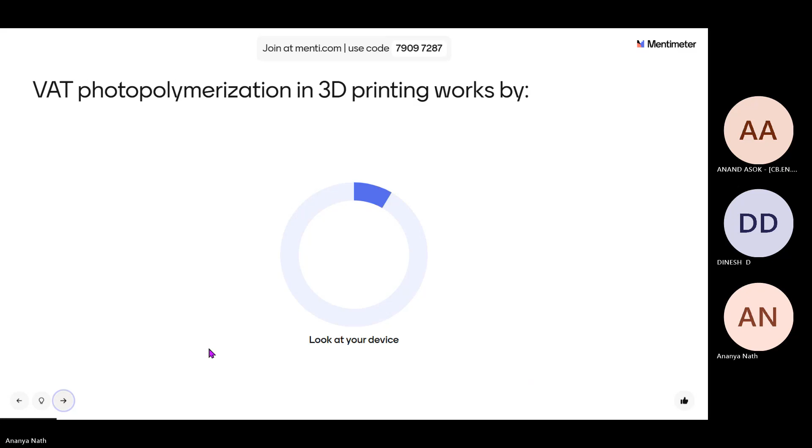VAT photopolymerization in 3D printing works by...

It's okay even if you put wrong answers, you will get some points as well, so it's fun when a lot of people join.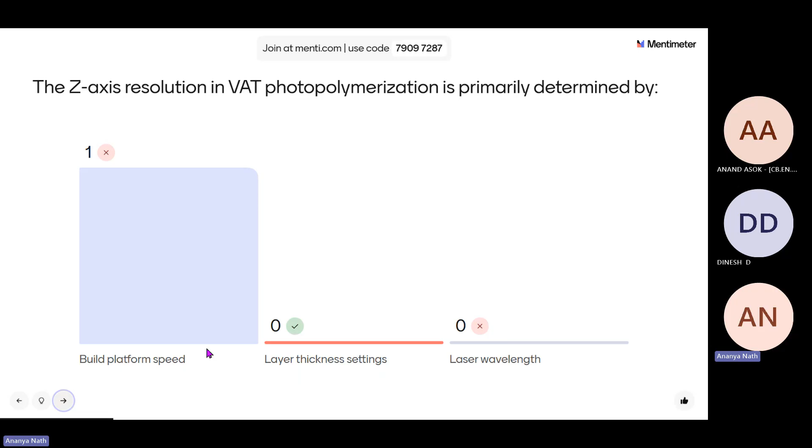But the layer thickness is something like you can put the layer thickness as 100 micron or 50 micron. Depending upon that, the resolution of the part will come. If your layer thickness is very small, your resolution will be very high, but your time will be very high and cost will be very high because the time is more. But if your layer thickness is thicker, your time will be less, cost will be less, but you have to compromise a little bit with the accuracy of the part. Your layers may be visible even after printing, which is not generally there in vat photopolymerization technique.

So if the layer is big, that means the pixel size will be less, is it? Okay, so now there is no relation between pixel size and layer thickness, because pixels are constant.

The screen you're putting below the VAT is there for the whole life of the printer, and the screen will have a definite number of pixels which will not be altered, which can never be altered. It works like your mobile phone. Your mobile camera will have some pixels, your screen will have some pixels, and your mobile camera will have some resolution, the quality. You cannot alter the quality of the phone camera once it's bought, right? It works similarly. So it's nothing related to the layer height.

Pixel is giving you lateral resolution. Layer height is giving you the longitudinal resolution. You understand? Okay? Let's go to the next question.

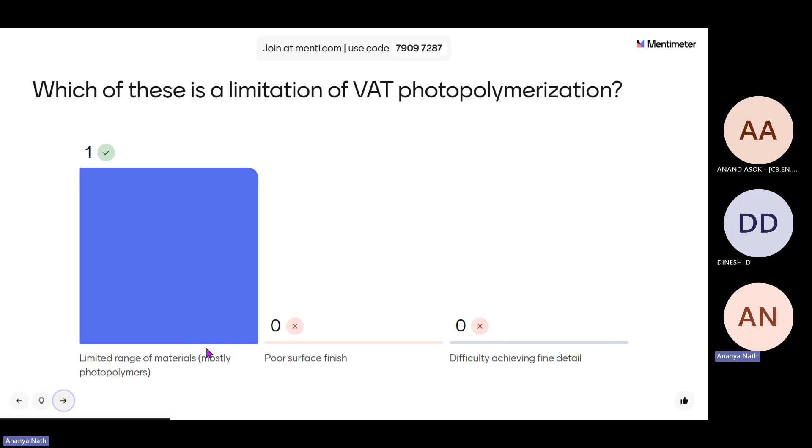Which of these is a limitation of this process? Easy, easy. Try to recall what are the words related to vat photopolymerization. Yes, so it's photopolymerization, so only photopolymers will be used.

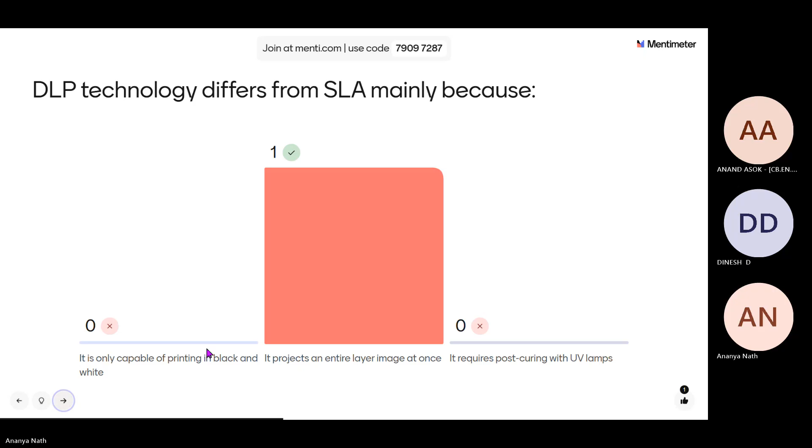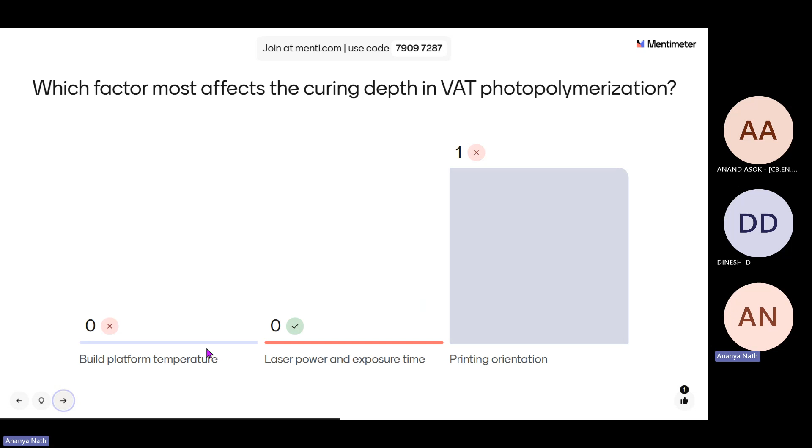Next question, let's see. So which factor most affects the curing depth in vat photopolymerization? So laser power and exposure time, because curing depth means the layer thickness.

So if your layer thickness is, for example, T1, the curing will take place by either UV or the laser only. That means the curing depth is how much depth the laser or UV can penetrate to cure it. So it will depend upon the laser or UV parameter, so then the parameter related to laser and UV. So now we have to see which are the parameters.

There are only two parameters: one is the laser power, the other is the exposure time. These are the only two parameters possible to alter in the heat source of vat photopolymerization. So that's why the curing depth determines how much layer thickness I should put. The layer thickness is directly related to the laser power and exposure time. These two parameters are interdependent, dependent on each other. So you have to see the layer thickness and then define the laser power and the exposure time. So it works like that.

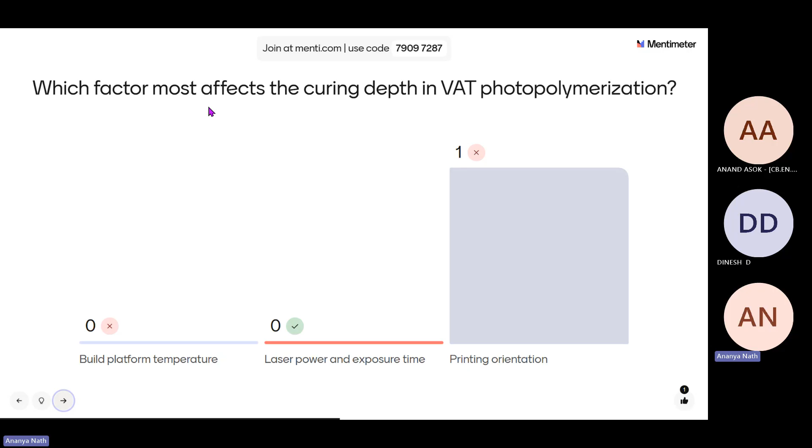So curing depth and thickness, are they both same, ma'am? Curing depth and layer thickness - okay, for example, if your laser power is 20 watt and your exposure time is 2 seconds, there is a formula. By that formula, if 20-watt laser power and 2 seconds of exposure time gives overall energy density sufficient to cure 20 micron depth of resin, then you have to put 20 micron as the layer thickness. Understood? Yes. You can put 20 micron layer thickness or 18 micron or 16 micron, not less than that, and never more than 20 micron, otherwise the layer will not be cured. So this is the relation.

So let's go to the next question.

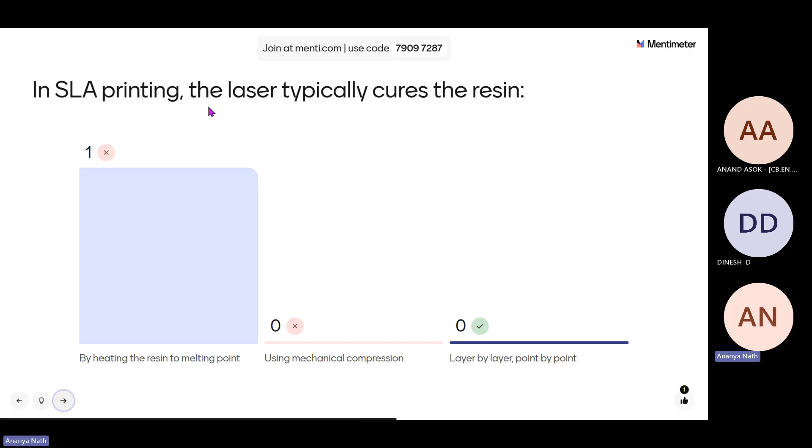It could be like 'heat the resin to its curing point' - maybe you have missed it. Okay, next question.

If the scan speed is high, then for a particular given area, the laser energy density is low. Laser power is one thing, laser spot diameter is a second thing, and energy density means power divided by area - how much power you are giving at one point. At the same time, exposure time is also there - for how much speed, for how much time you are putting that much power, that is also important. So that will give you the heat content of that particular area. If you are moving the laser very fast onto the build plate, then for a given area you're not putting enough energy, not enough heat content. The curing depth depends upon how much heat you are giving. So if you increase the scanning speed, the heat is less for that area, meaning it will not reach the full penetration depth.

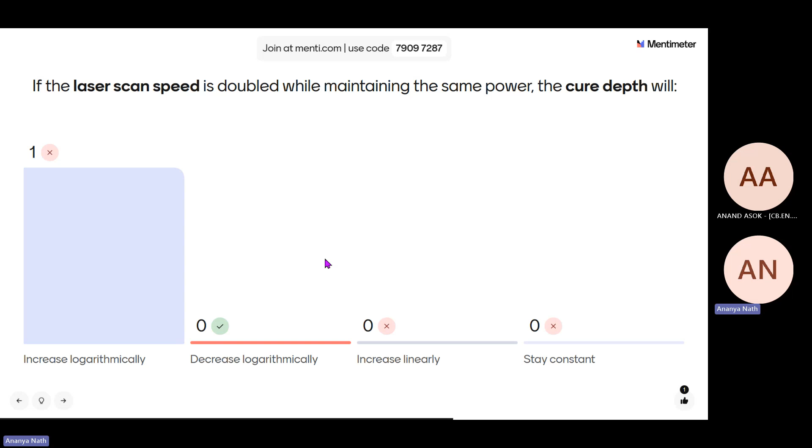So what I was saying - if you are increasing the scan speed, that means you're putting less energy density for a given area, which may not be sufficient to cure that much depth or thickness of the resin. That's why if your scanning speed increases, the curing depth will decrease. There is a relation - it's logarithmically decreasing. That is the point. Next question.

Now why it is slow? Four more questions to go.

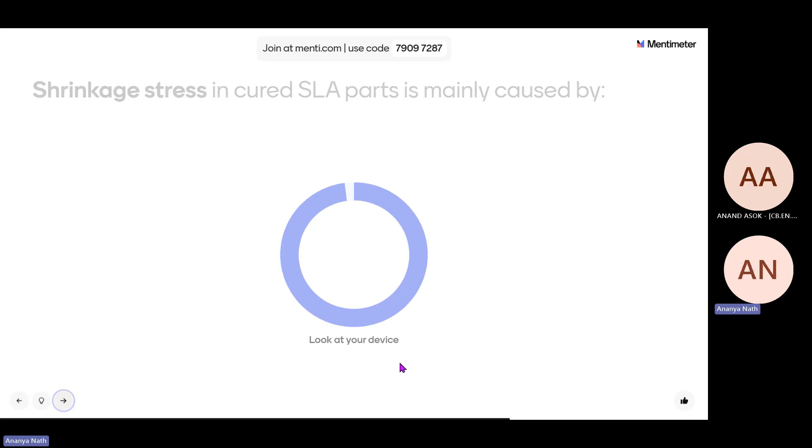Shrinkage stress in cured SLA part is mainly caused by - so it's a tricky question. Just try to think about the process, what I have said. Yes, so cross-linking density changes cause the volumetric contraction during cure.

Shrinkage stress means when you are curing the SLA part, obviously it's going from liquid state to a solid state, and it's also getting hardened and densified. Ma'am, one more doubt - does this laser scanning help in curing? Okay, so I have demonstrated the stationary optics one.

There is one process in which people use flying optics, which means your laser is moving from one point to another point. In the DLP process, the UV light is not moving - it's exposed for 3 or 4 seconds for a layer, so it will have a power and the exposure time. But if your laser is moving from one point to another, just imagine moving a laser pointer from one point to another - the laser moves onto the resin, and whatever path it takes, that area gets cured. So your scan speed is actually the exposure time that you are giving for a given area.

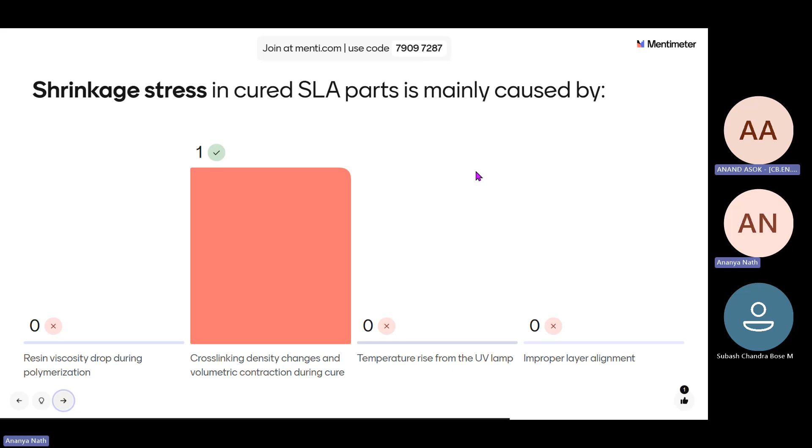So there are a few things to note down here. First of all, when you are talking about DLP or any vat photopolymerization technique, you are using photopolymerization, which means if you're using a resin that has one-wavelength photopolymerization only, like a 532 nanometer curable resin, the resin will be cured only if you are putting a light with 532 nanometer, which is a green light.

So it's better to put the laser, because a laser will only have 532 nanometer and it will not have any other wavelength. But the sunlight or normal daylight has all the various wavelengths from 400 to 700 nanometer. So if it's a 232 nanometer curable resin, that means it needs a UV light to cure. And if you change the wavelength of the light itself, the resin will not be cured. So that is its property.

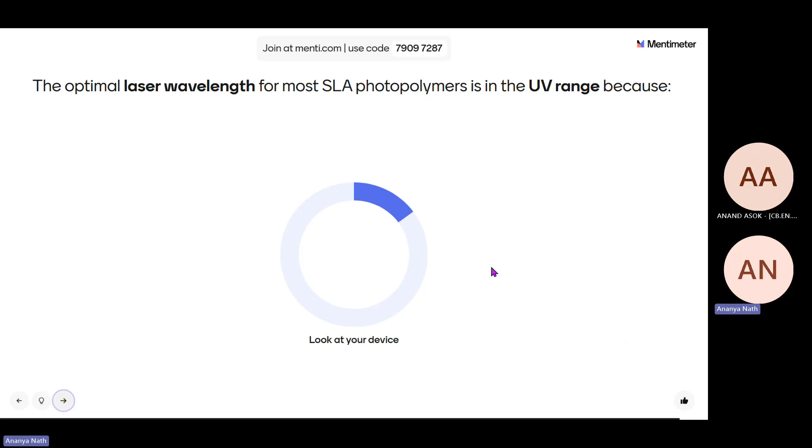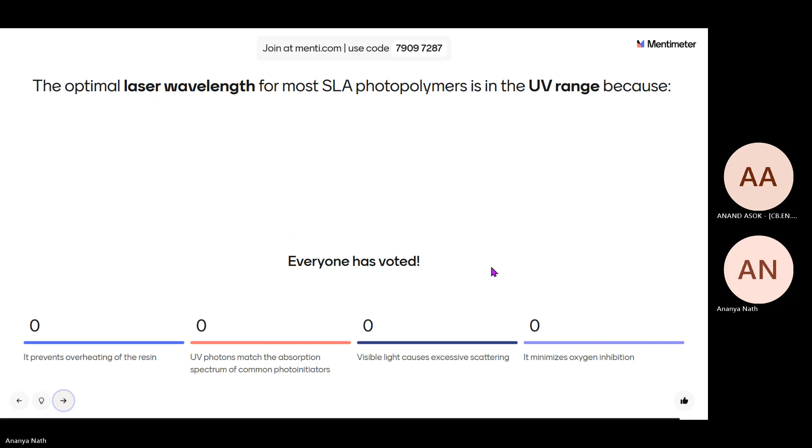Next, the last question. The optimal laser wavelength for most SLA photopolymers is in the UV range, because UV photons match the absorption spectrum of common photoinitiators, as I've explained. So, correct. That's the end of the test.

Ma'am, one doubt. Reducing pixel size, will it reduce the lateral resolution? Similarly, if layer thickness is reduced, will it reduce the longitudinal resolution? No, if you reduce the layer thickness, you will increase the longitudinal resolution. Okay. But reducing pixel size will reduce the lateral resolution? No, increase, increase. Oh, in both cases it is inversely proportional.

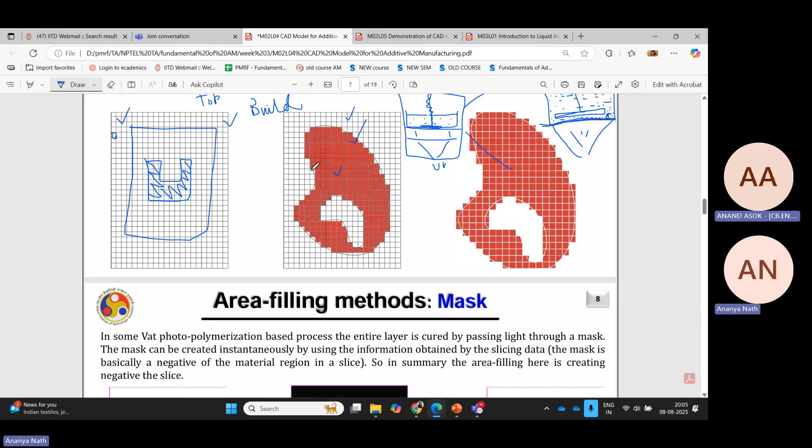Yeah, both cases. Just try to recall this slide. If you reduce the size of the pixel, you will end up covering the part smoother, in a better way. The accuracy of the periphery will be better. That's why if you reduce it, you will increase the resolution.